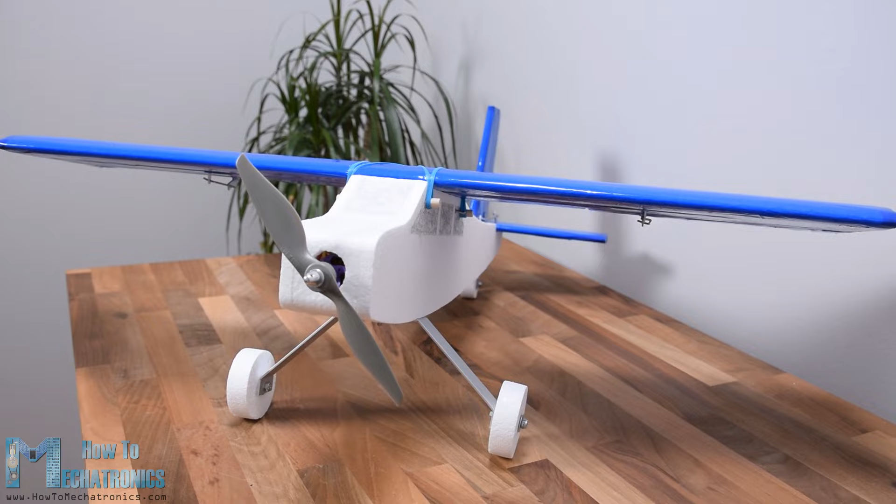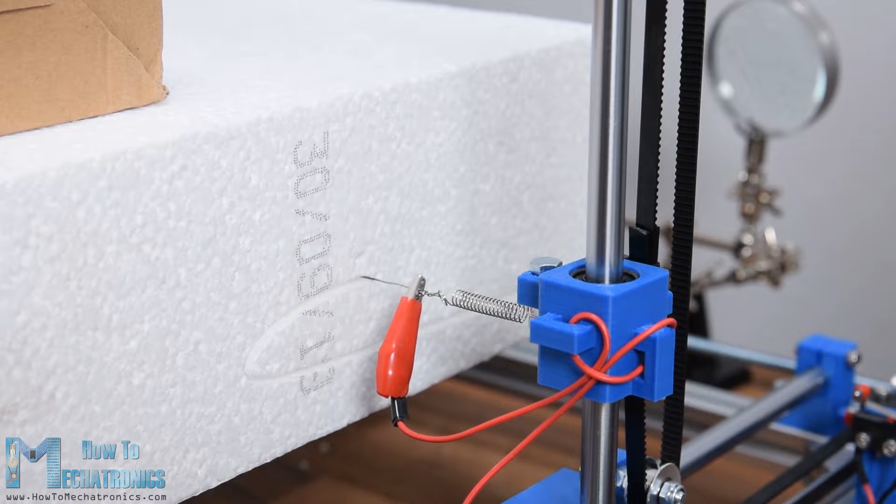So, the airplane is entirely made out of styrofoam. For making the shapes, I used my Arduino CNC foam cutting machine, which I already showed you how I built in a previous video. Although I'm using a CNC machine for building this Arduino RC airplane, I can still say it's 100% DIY because the CNC machine is also a DIY build.

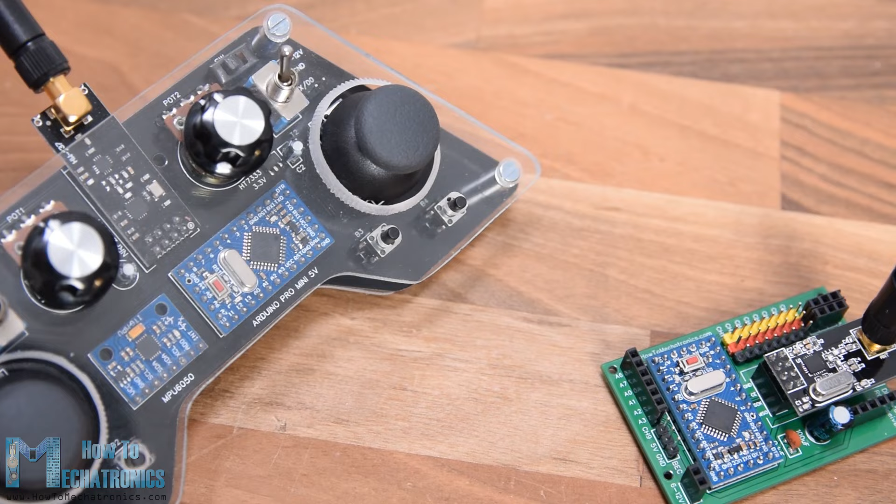Moreover, the control of the airplane is also 100% DIY, based on Arduino and the nRF24L01 module for the radio communication. Using the right joystick of the transmitter, we can control the ailerons and the elevator of the airplane, and using the left joystick, we can control the rudder and the throttle.

In addition to that, using the right potentiometer, we can adjust the control's responsiveness or reduce the amount of servo travel. And using the left potentiometer, we can sub-trim the rudder or adjust the neutral position of the servo arm. Oh, and I almost forgot to mention, the main feature of this Arduino RC airplane is flying. So yeah, it can fly.

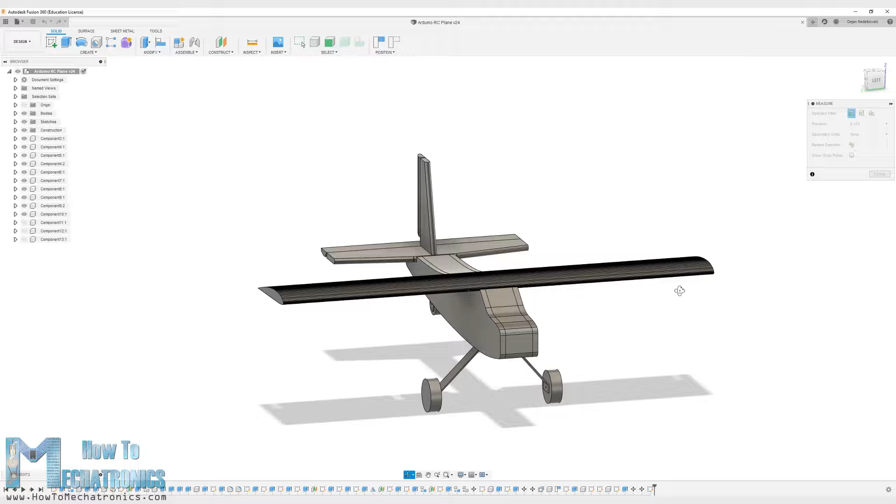I started by designing the airplane using a 3D modeling software, Fusion 360 in this case. I made the design by looking at some commercial RC airplanes and following some basic guidelines or rules of thumb for model airplane parameters. The starting point is usually the wingspan, and I chose it to be 80 centimeters. From there we get the fuselage length, which is generally 75% of the wingspan.

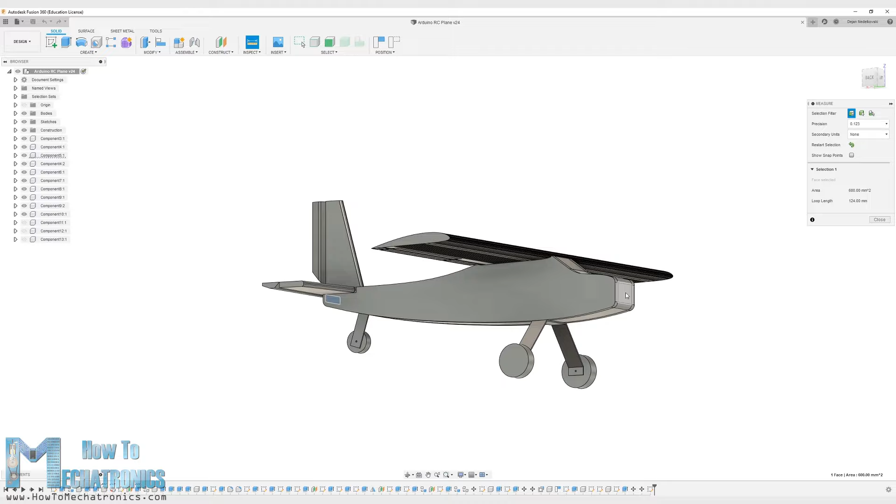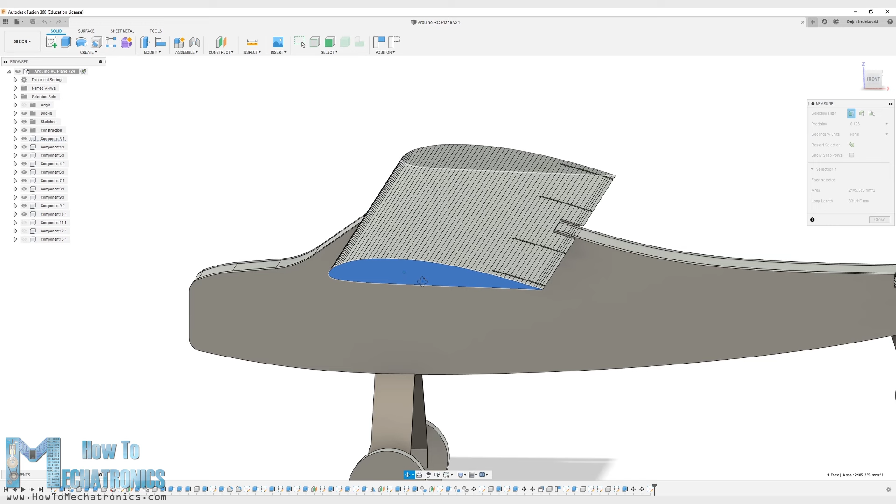As for the airfoil, or the wing cross-section, I chose the Clark Y airfoil, which is a popular choice for RC airplanes. I downloaded the airfoil shape from airfoiltools.com as an SVG file and then I imported it into Fusion 360. I adjusted the size appropriately so that the wing chord, or the length of the wing in streamwise direction, is around 1/5 of the wingspan.

The horizontal and the vertical stabilizers are also sized according to those basic guidelines, and I will include all these parameters in the website article in case you want to design your own airplane. Also, I will include the 3D model of this airplane so you can download it. The link to the website article is in the description of the video.

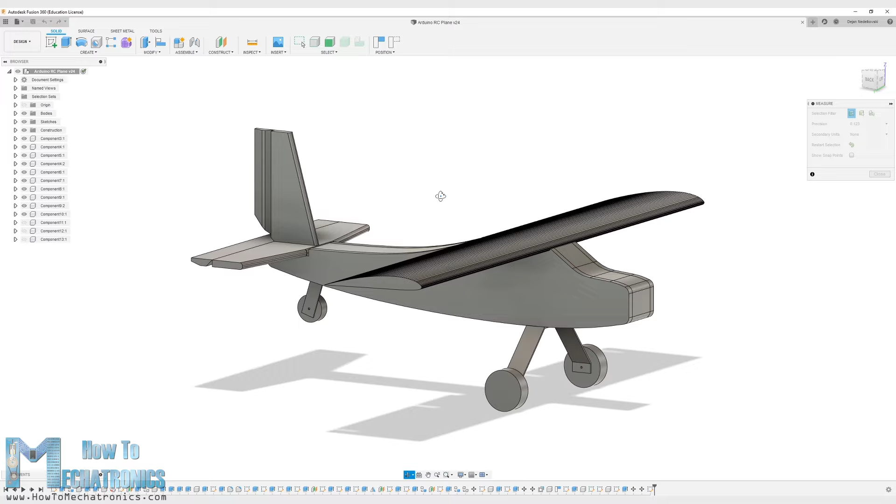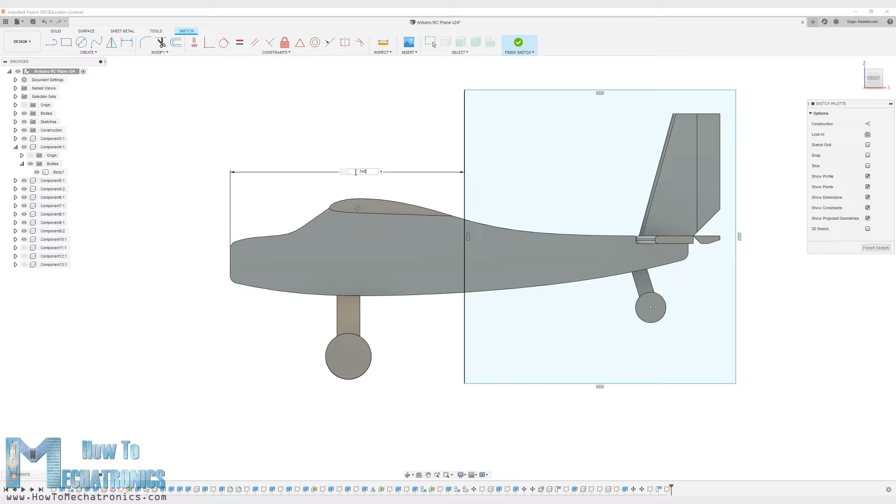The fuselage of the airplane will be made out of two 10mm sides and a 50mm core, which will be hollow to accommodate the electronics. Now, as my Arduino CNC foam cutting machine work area is limited to 45 cm and the fuselage is 60 cm in length, I had to make the fuselage out of two parts. So I cut the fuselage at 34 cm from the front point and made a new sketch in which I projected the shape and added a point near it.

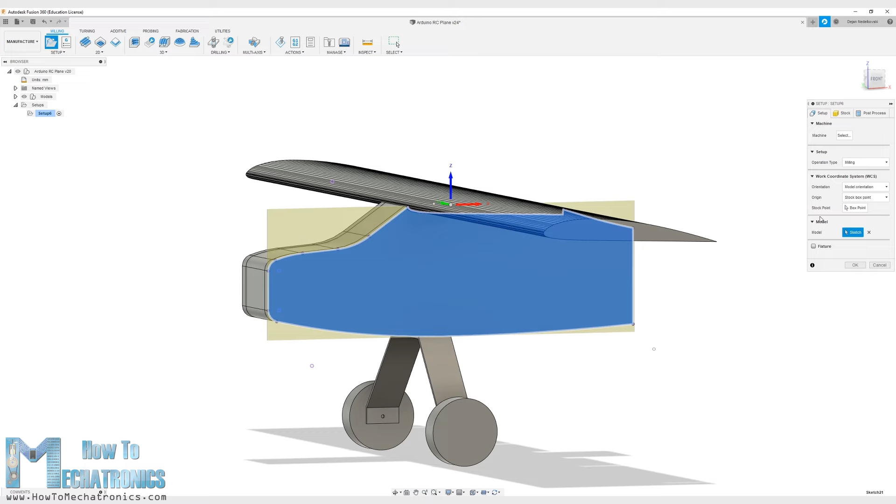Next, in the manufacturing tab of Fusion 360, I can generate the G-code for cutting the shapes. Here, first I made a new setup where I selected the sketch as a model, selected the point I added earlier as origin for the setup, and adjusted the X and the Y axis appropriately. Then I chose the 2D contour operation and generated a new tool with a diameter of 3mm because that's the approximate size of the cuts that the hot wire makes when passing through the styrofoam.

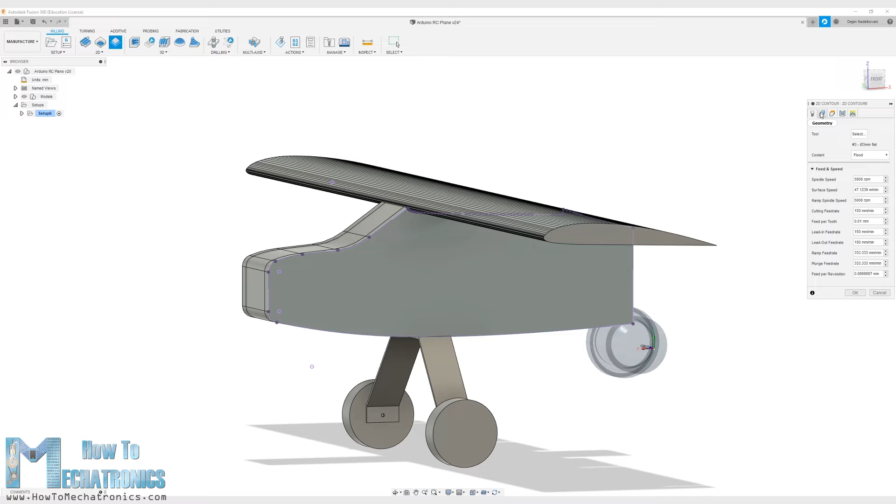Here we can also set the cutting feed rate, which depends on the hot wire itself and the hardness of the styrofoam. I set it to 150 mm per minute. Then in the Geometry tab we can select the contour or the shape that needs to be cut. As for the heights, I set all of them to 1 mm as there isn't any z-axis movement on my foam cutting machine. Lastly, in the linking tab, I selected the entry position to be the edge located near the origin point.

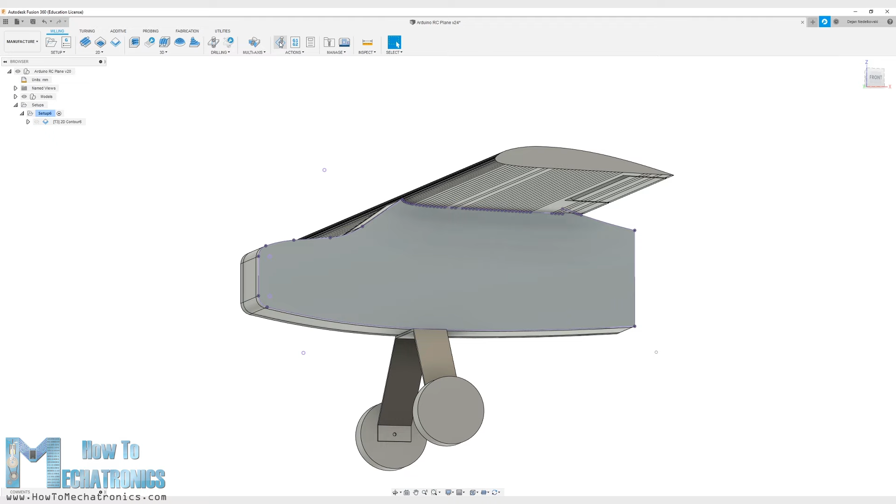With this, the toolpath is generated and we can take a look at it by clicking the simulation button. The toolpath should be a closed loop single pass, and if that's the case, we can finally generate the G-code. For that, we can go to Post Process, select the Grbl firmware, select the output folder, name the file and click the Post button.

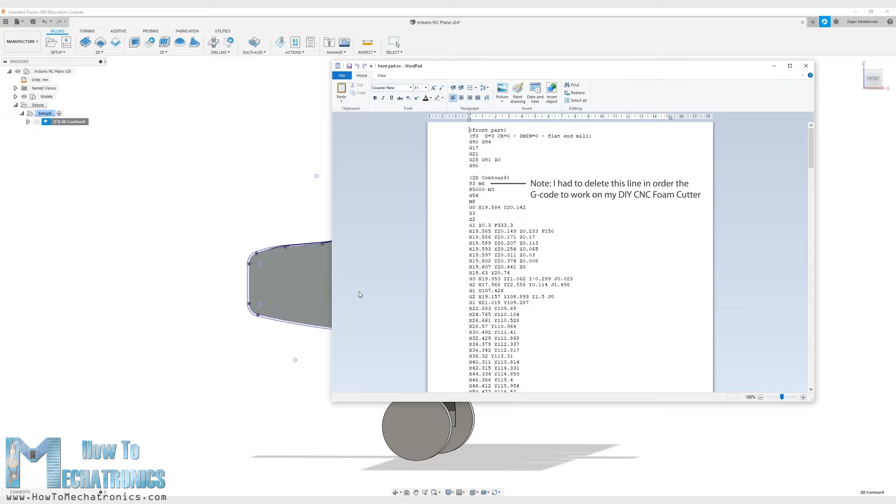Then we can save the file and we can see the G-code in the WordPad editor or something similar to it. So once we have the G-code file, we can load it in the Universal G-code Sender and send the G-code to the CNC machine to make the shape.

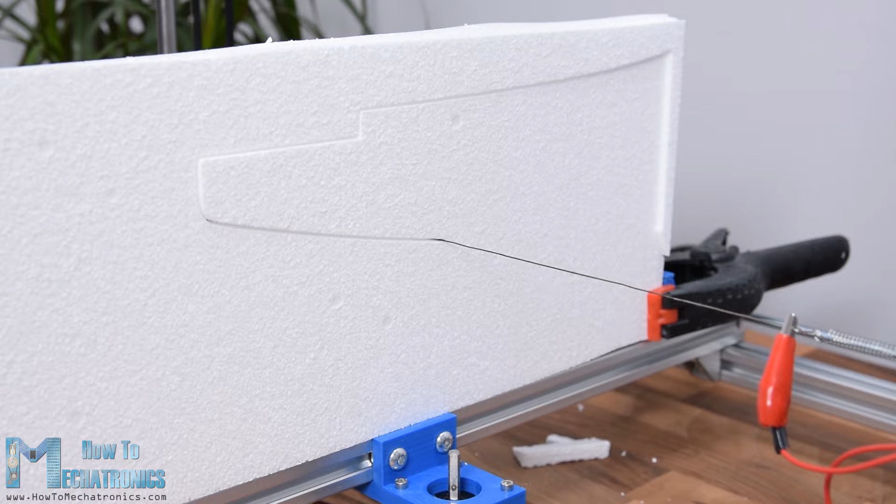We can note that the process that I have just showed you is probably not the best one, or not professional at all, but still it does the job for getting the G-codes to work with my DIY CNC foam cutting machine.

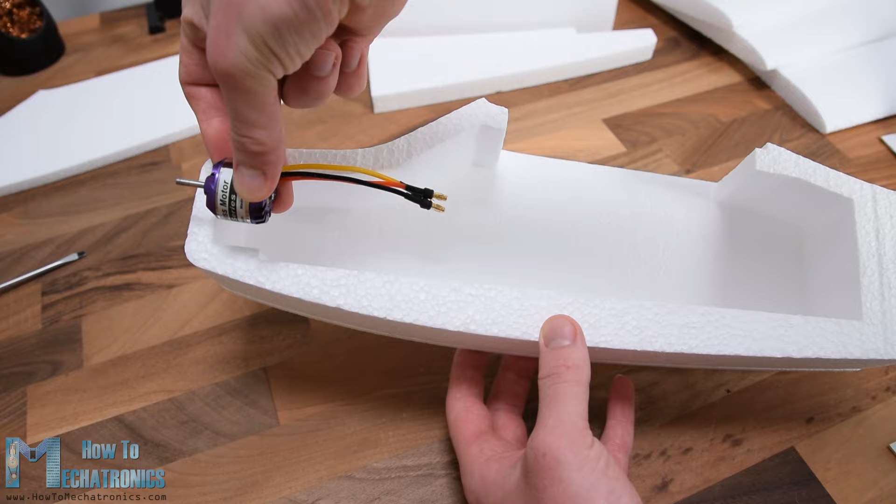Before gluing the other side, I will make the holder for the motor. For that purpose I am using 30 mm wide aluminum profile, which is pretty lightweight. I cut the profile at around 18 cm, marked the holes for mounting the motor and drilled them using a 3 mm drill bit. Then I bent the profile at 90 degrees.

I secured the motor to the holder using some M3 bolts. Using this assembly, I made a hole through the front part of the styrofoam. Then, using a utility knife, I enlarged the hole to 30 mm in diameter, the same as the motor diameter.

Next, on the other side of the motor holder, I made 4 holes which will serve for securing the holder in place, and also for attaching the landing gear. I marked the location of these holes on the fuselage, and using a 4 mm drill bit, I made holes through the styrofoam manually. I made another aluminum piece around 7 cm long with the same holes, and now I can use it for securing the motor holder.

Using M4 bolts, we can easily secure the motor holder in place without damaging the styrofoam. However, I will do that later, so I removed them and continued with gluing the other side. Using the same method, I glued the back pieces as well.

Okay, so the next step is the marriage, or connecting the front and the back part of the fuselage. In order to make the connection stronger, I will add some simple barbecue sticks in between them. I would suggest using even bigger sticks, because when the airplane crashes, it might easily break here.

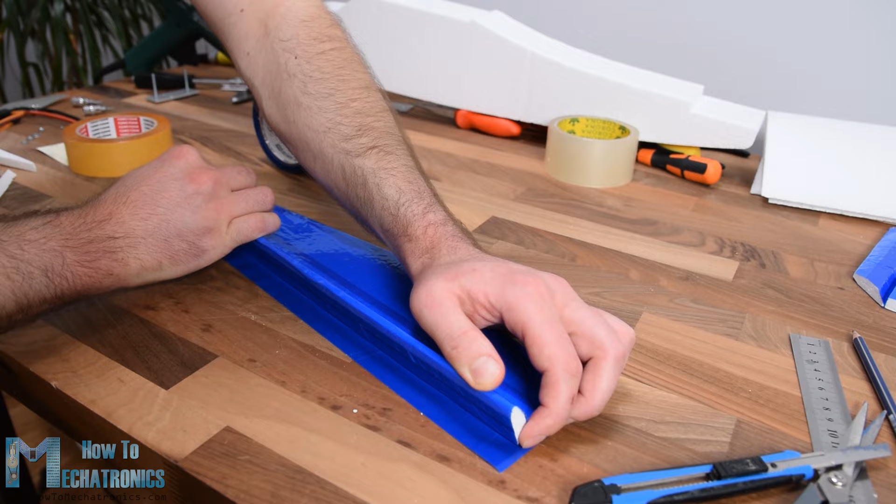Now finally I can make the hinge for it, and I am doing that using the packing tape again. So I just connected the two parts together with the tape, and that makes quite a strong hinge. I repeated this process for the horizontal stabilizer as well. For making the hinge even stronger, we can also add tape on the other side.

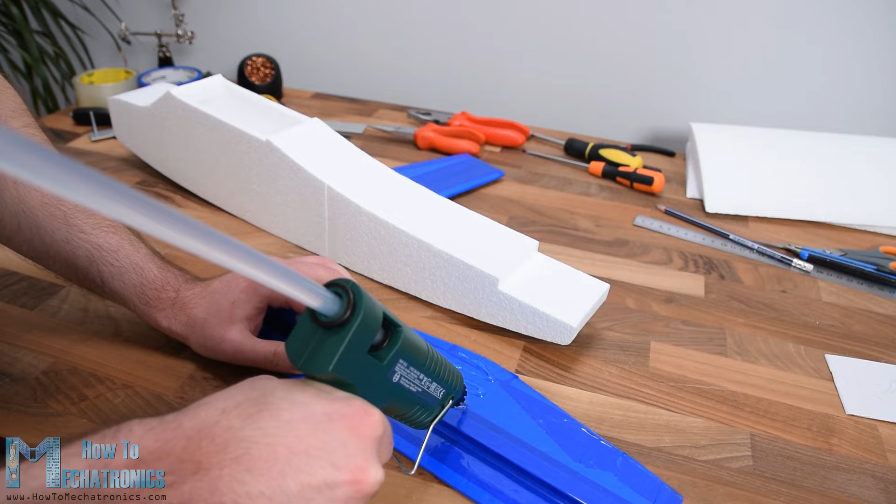Using the same tape, I wrapped the sides, and with that the two stabilizers were done. I moved on with gluing the horizontal stabilizer to the fuselage using hot glue.

For securing the vertical stabilizer, first I inserted and glued 3 barbecue sticks through the horizontal stabilizer and the fuselage. Then I put some hot glue on them and the contact surface and pushed the stabilizer down firmly. With this we are done with the stabilizers, and now we can move on with making the wing.

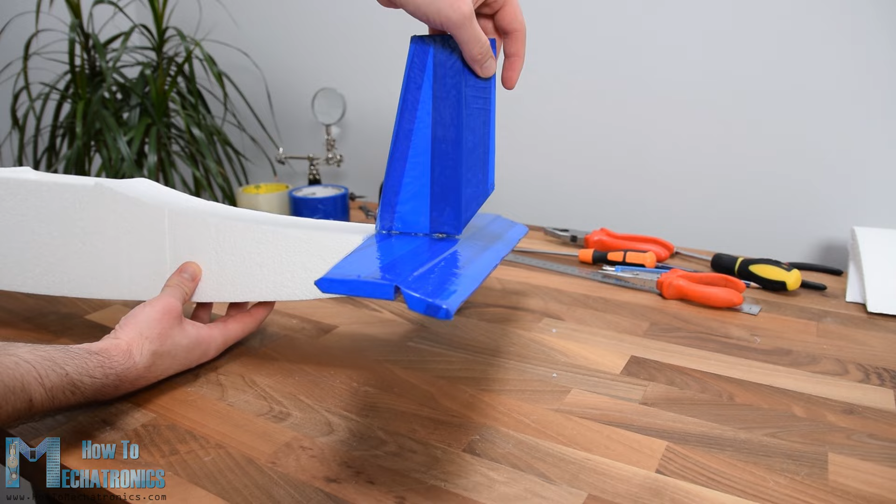As I already said, the wing will be made out of 3 pieces, because of the limited area of my DIY CNC foam cutting machine. Again, I am using barbecue sticks for providing additional strength when gluing the pieces. For attaching them precisely in line, I am using a straight wooden strip on which I can slide the pieces.

Once done with that, the wing is actually quite fragile as it's long and thin. Therefore, I will reinforce it by adding a wooden stick to it. I cut the stick to size and mark the wing where I need to make a pocket so I can fit the stick in it. Using the utility knife, I slowly and carefully made the pocket. I added some hot glue to it and secured it in place without disturbing the airfoil shape too much.

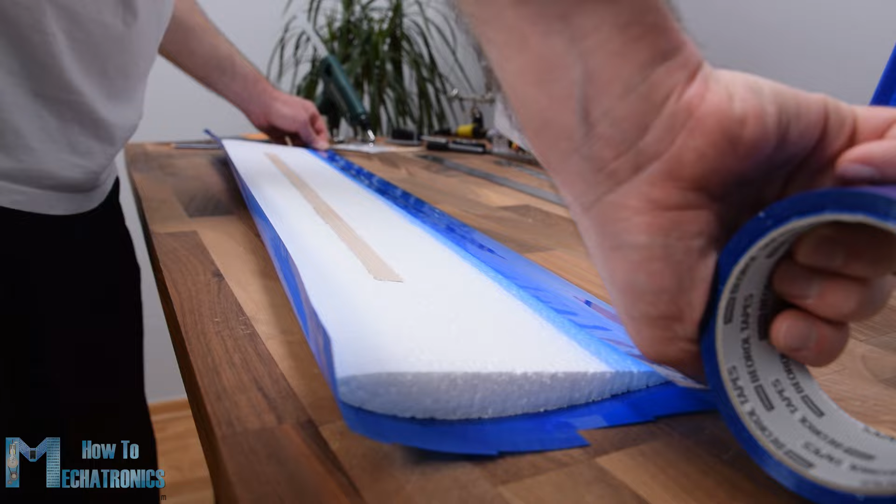Although stronger, it would still easily break apart if it hits the ground, so therefore I will wrap it all with the packing tape, the same as I did with the stabilizers. I started adding the tape from the back side or the trailing edge of the wing to the front side or the leading edge. In this way the incoming air from the front won't tend to detach the tape. Although this process looks pretty easy, it can be a bit annoying if you don't have steady hands and enough patience.

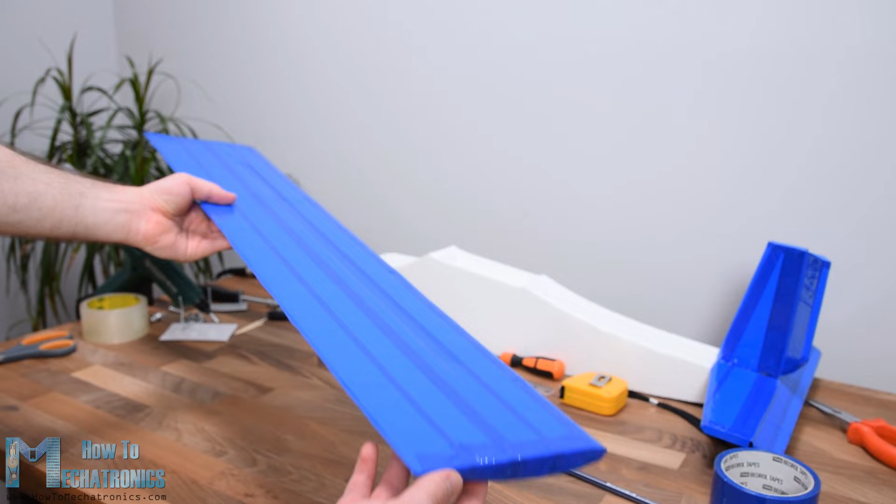Nevertheless, I think the wing came out just perfect. Now it is much stronger, more aerodynamic, and it looks quite good. Okay, the next step is making the control surfaces of the wing, or the ailerons. I'm going to make them 22 cm wide and about 1/5 of the wing chord in length.

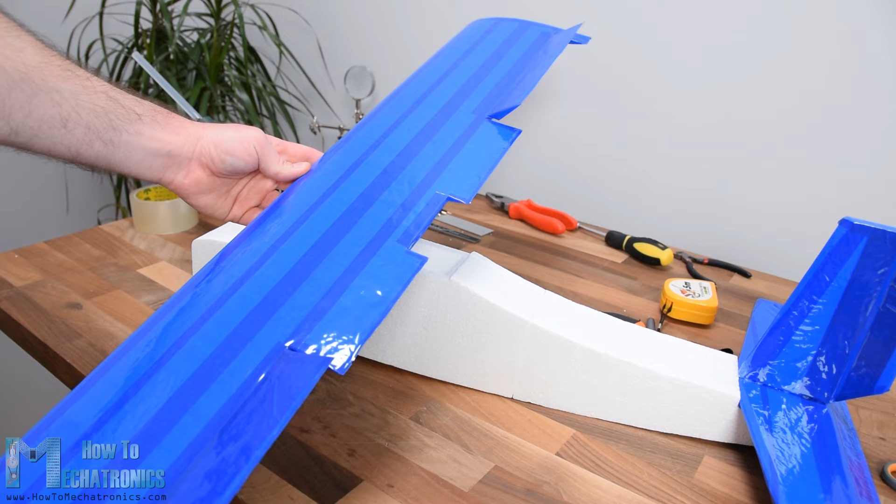In order to be able to move freely, I cut off like ½ centimeter of it. And of course I wrapped all edges exposed by the cutting with the tape. Next I beveled the bottom part of the aileron at 45 degrees, and in the same way as shown earlier, now I can hinge it to the wing. In order to fit on the fuselage and be able to easily attach the wing on the fuselage, I had to make one more recess in the middle of the wing.

Next, it is time to install the servo motors for controlling the ailerons. I'm using the 9 grams micro servos. I marked the location where they will be placed, and using a utility knife I carefully made an opening in the wing so that the servo can fit in. Meanwhile, I removed the mounting brackets of the servo. I put some glue on the servo and inserted it in the opening.

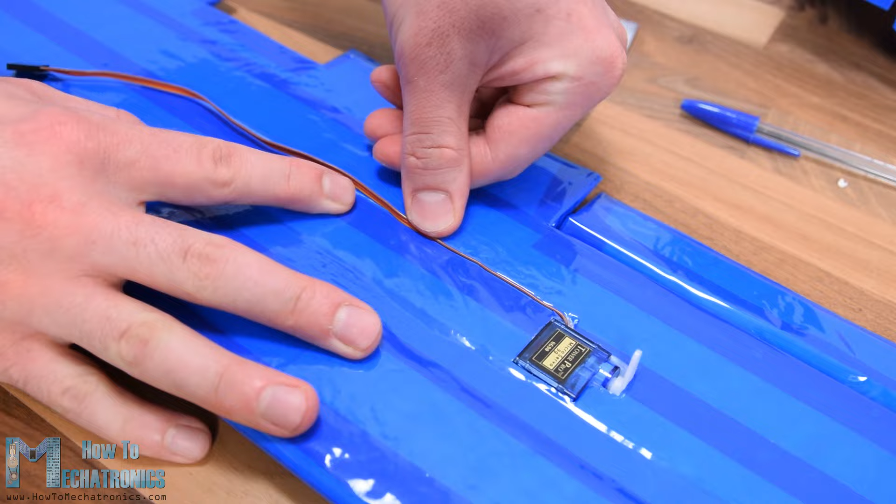Then, using a utility knife, I made a small groove from the servo to the center of the wing so that I can fit the servo wiring in it. Finally, I covered everything with a piece of tape. I repeated the same process for the other side as well.

I continued with making the control horns. I'm going to make them out of the aluminum profile that I used before for making the motor holder. I draw the shape by hand to approximately match the servo motor horn height and to hang over the hinge point. I cut the shape using a hacksaw. I will use 2mm steel wire as control rod, so I made an opening in the horn using a 2.5mm drill. I made a small groove in the aileron and glued the horn in place.

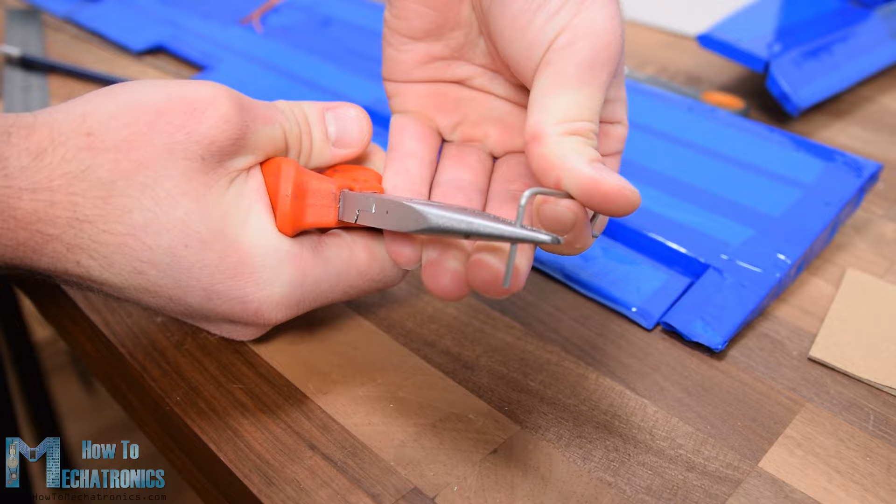Then I measured how long the control rod should be, and I made it out of 2mm steel wire with the help of some pliers. We need to note that when measuring and inserting the control rods, the servo motors need to be in neutral position. We can do that manually by placing it in the middle of its motion range, or by connecting it to a servo tester, or do that with an Arduino. I repeated this process for the other side, and with that the wing is now completely done.

Next I need to install the servos for controlling the rudder and the elevator. I'm using the same 9g micro servos here as well, and the process of installing them is actually pretty much the same as I have just explained. First I marked the location, made the opening using a utility knife, and glued the two motors in place. Here they are placed next to each other, but their output shafts are on the opposite side.

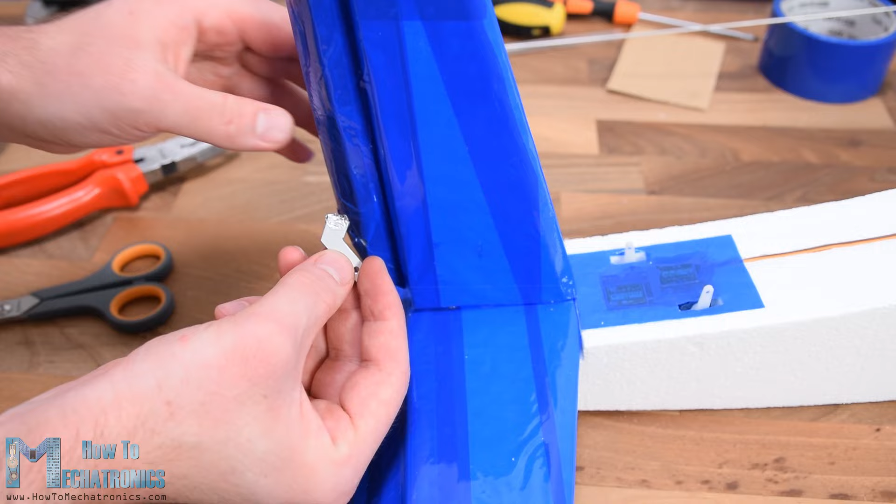Again, I made a small groove in the fuselage in order to conduct the servo wiring to the electrical compartment. I covered the servos with a piece of tape and made openings for the servo horns. In the same way shown earlier, I made the control horns and glued them in place using a glue gun. Lastly, I made the appropriate control rods and installed them accordingly.

Okay, so next I'm going to install 8mm wooden sticks which will serve for securing the wing to the fuselage. I made the holes manually using an 8mm drill bit. The rods should hang over around 1 cm on both sides. I secured them to the fuselage using some hot glue, and here's how they actually work.

We use rubber bands for securing the wing to the fuselage. In that way the wing can be easily removed, and in case of crashing, the rubber bands will significantly reduce the impact of the wing. At the same time, the whole assembly is plenty strong.

Next I'm going to make the landing gear. For that purpose, again, I will use the same aluminum profile and wheels made out of styrofoam. I made them using the CNC machine the same way as explained earlier. I made some small grooves on the aluminum profile so I can easily bend it. Here's how the landing gear should look after bending it.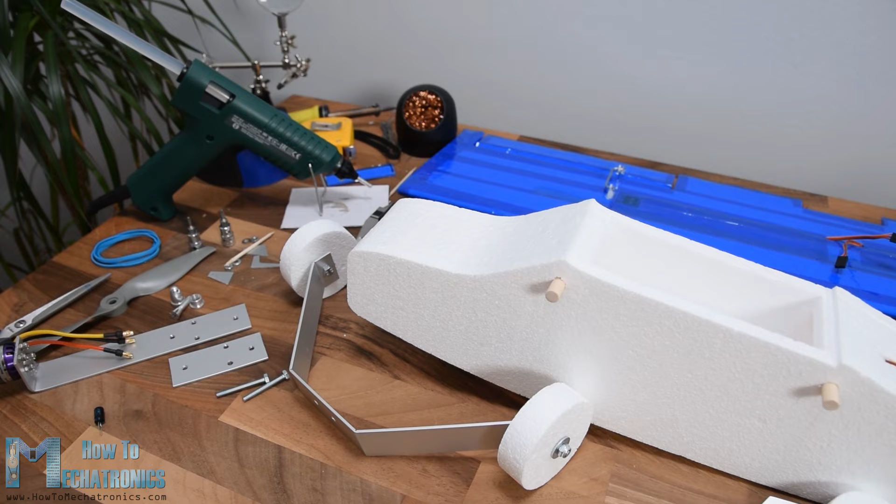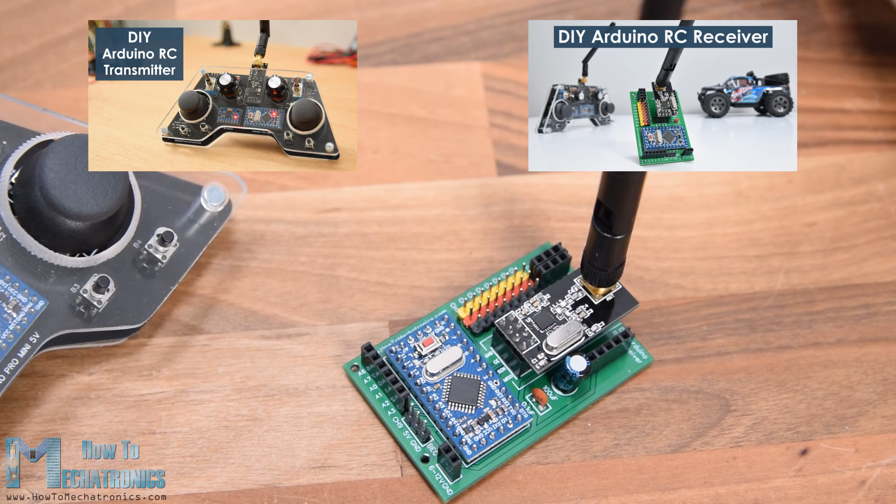Okay, so now all the components are ready, and before I assemble them, let's take a look at the electronics of this project. So, as I already said, this RC airplane is entirely based on Arduino. Both the transmitter and the receiver are custom builds based on the Arduino Pro Mini board. I already have detailed tutorials on how the transmitter and the receiver work, so you can check them out for more details. Here I will explain the circuit diagram and the working principle of this Arduino RC airplane and how everything needs to be connected. So the radio communication is based on the nRF24L01 modules.

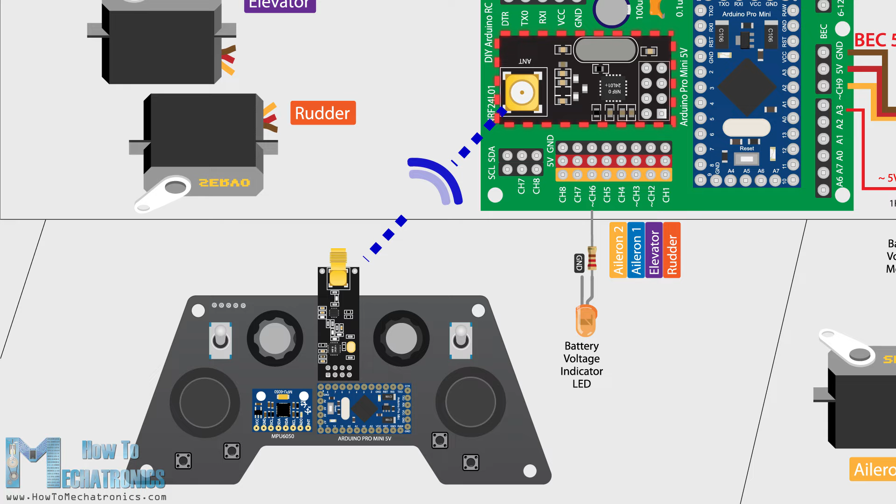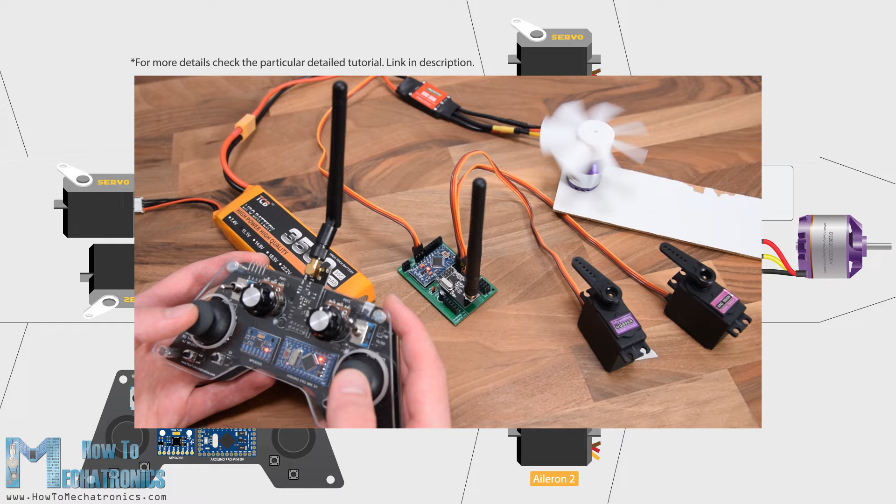Although it might look a bit complicated, this DIY Arduino transmitter is actually quite simple. It has several controllers, the joysticks, the potentiometers and some buttons, and it constantly sends their data to the receiver. The receiver receives this data wirelessly through the nRF24L01 module, and it outputs appropriate commands to the servos and the brushless motors for controlling the airplane. Controlling servos and brushless motors using Arduino is also quite simple, so therefore this entire Arduino RC airplane concept I think is not that hard to understand.

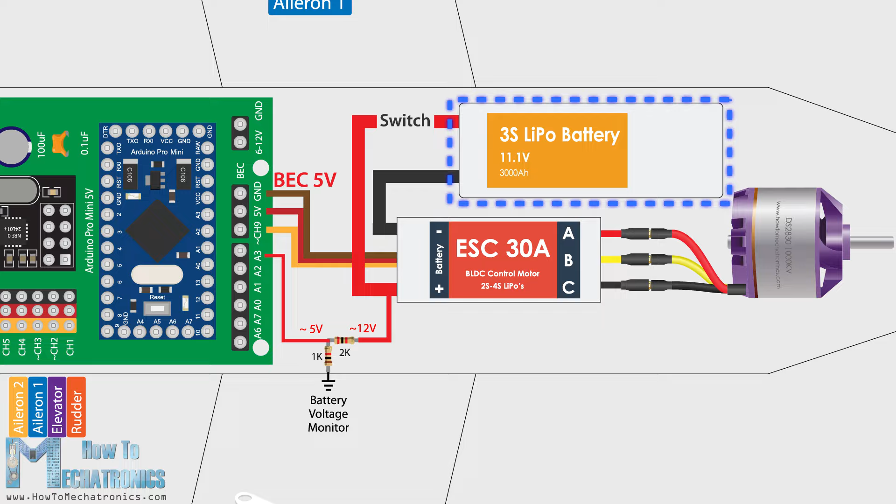The brushless motor I am using in this project has a rating of 1000KV, and it requires a 30 amp ESC. The ESC drives the motor and also provides power to the Arduino and the servos through its battery eliminator circuit feature, which outputs 5 volts. And the power for the ESC and the brushless motor comes from a 3S LiPo battery.

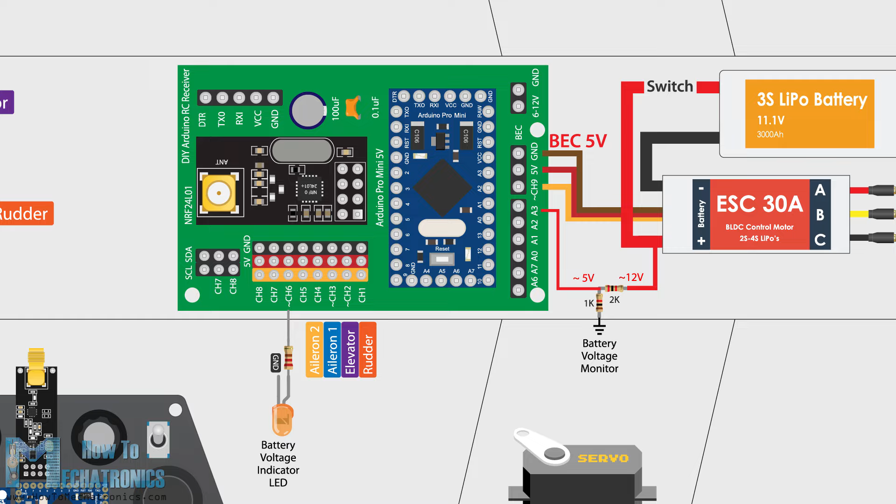I added one more thing to this airplane, and that's a simple LED which will indicate if the battery is empty. Using a simple voltage divider, we can drop the 12 volts coming from the LiPo battery to around 5 volts, so we can read them with the Arduino analog input, and so we know when the battery will drop below 11 volts. The receiver still has several free channels, so we can add more features to this airplane if we want, like strobe lights, flaps, dropping mechanisms and so on.

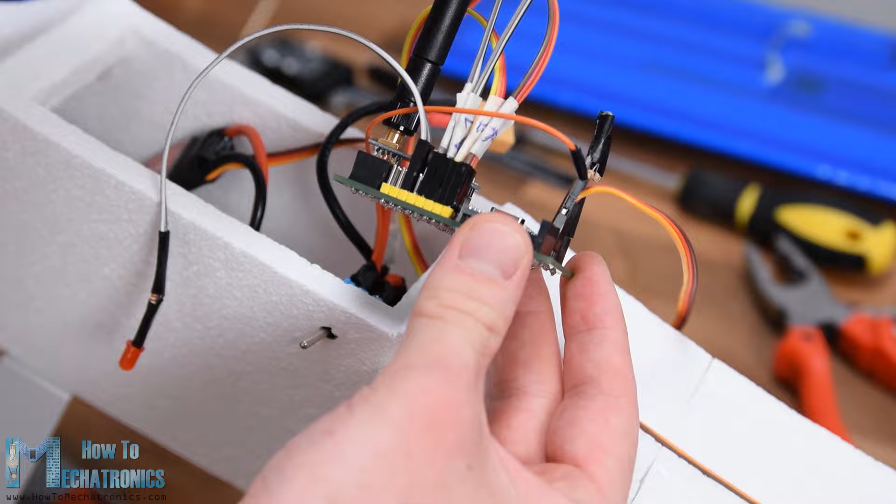Nevertheless, now we can finish the assembly. So I connected everything as explained in the circuit diagram. On channel 1 is the rudder, channel 2 the elevator, channels 3 and 4 the ailerons, and on channel 6 is the LED. I glued the LED on one side and the power switch on the other side.

We can note here that the landing gear is attached to the airplane using the 2 bolts on the motor holder. I actually lost some of that footage, so I cannot show you exactly how I did it. In a few words, I simply inserted the motor with the holder from this top opening, bolted it in place as shown earlier, and attached the landing gear as well. When inserting the holder, I also added some rubber bands so they can hold the battery in place. So once I connected the battery to the ESC, I squeezed everything in.

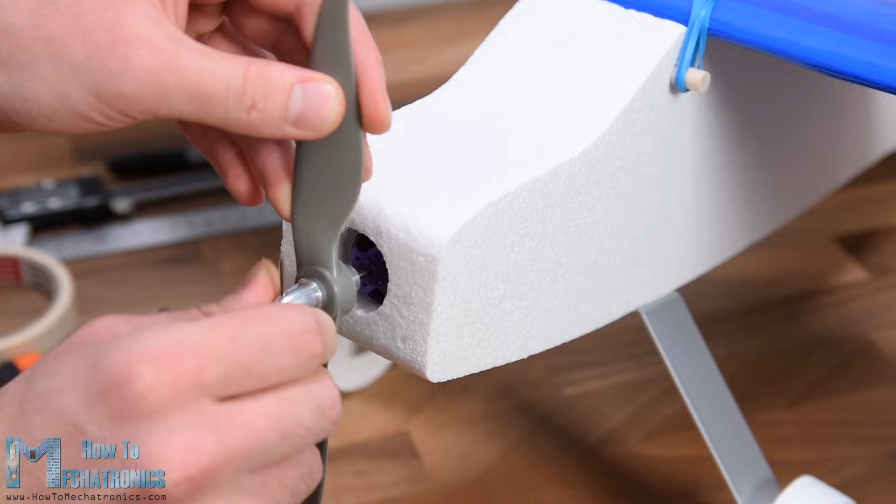Finally, using the extension cables, I can easily connect the wing ailerons to the receiver and then secure the wing to the fuselage. On the front, I attached the propeller to the motor, and what's left now is to check the CG, or the center of gravity of the airplane. The CG is probably the most important factor whether the airplane will fly well or fly at all. The airplane initially was tail heavy, so I moved the battery to the front and it got balanced.

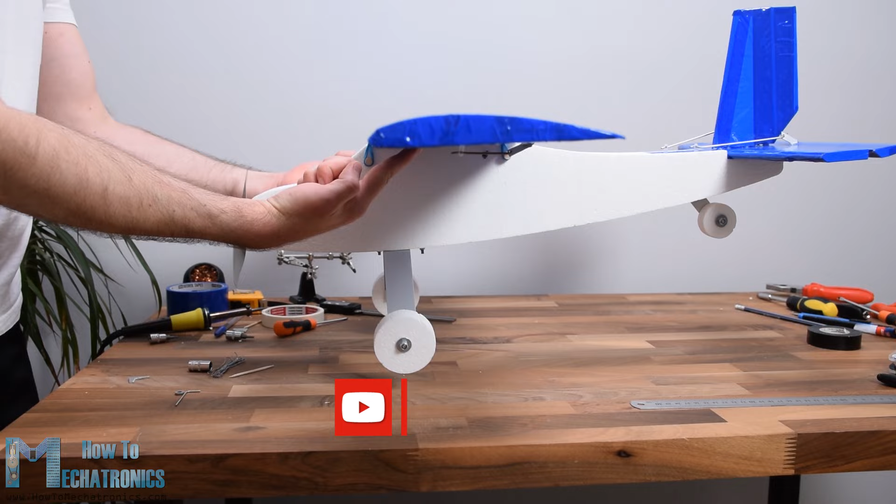So that's it, our Arduino based RC airplane is now done and we can go outside to try it out. Here's its first try, or the maiden flight.

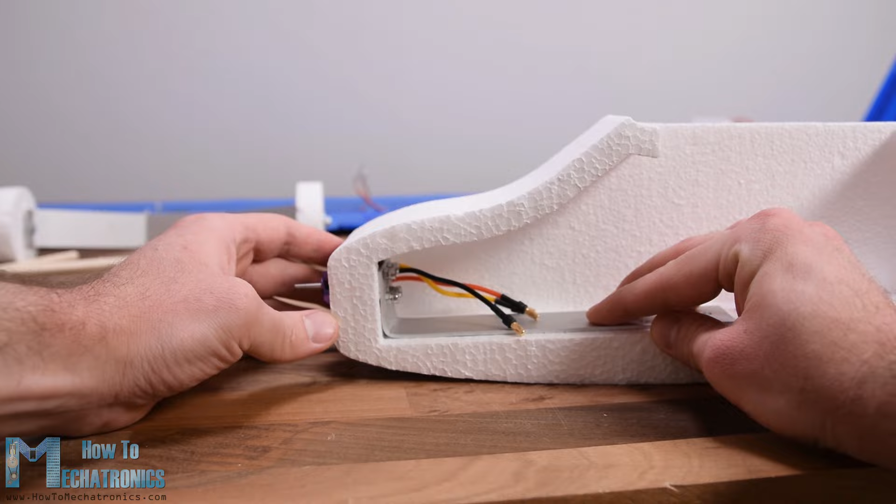Well, that was not so cool, especially after seeing the result of the crash. My conclusion here was that the airplane was still tail heavy and it felt like the motor didn't have enough power. As I didn't have another motor or propeller to try, I modified the nose of the plane to be a bit smaller, moved the motor more to the front so it has better airflow, and also rounded the edges on the front. As for the structure, I reinforced it with some wooden sticks and aluminum profiles that I glued in the inside area of the fuselage.

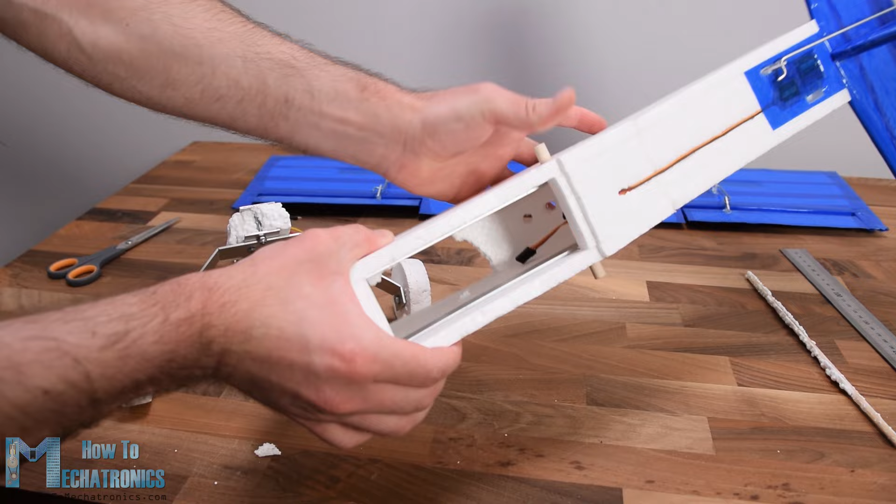At the bottom of the electronics compartment I made 2 holes, one for the air to escape that comes from the front opening and the other for getting the NRF24L01 antenna outside for having better range. Okay, so here's the second try. Again, almost the same thing, though it felt like it had better airflow or more power now. The fuselage broke again, which tells that this styrofoam is pretty weak for this purpose. I made a new fuselage and this time I used a little bit of duct tape for reinforcing it.

Try number 3. It looked promising, but the terrain I have for takeoff is actually not good at all. The airplane started moving to the right, hit the edge of the road and broke again. I repaired it again and this time I wrapped almost the entire fuselage with duct tape. I should have done that much earlier as this gave the right strength to the fuselage and it didn't break even after several more crashes.

The problem now though is that after several crashes I broke all 4 propellers that I had, so in this try I'm using a glued propeller. Of course the propeller tore apart at takeoff. I tried with another glued propeller made out of 2 already broken propellers and this time I was actually lucky and the airplane finally took off properly. Well, the luck didn't last so long as the propeller broke again in mid-air.

Nevertheless, as this was my first ever experience with flying an RC airplane, I guess I can consider this project successful, as I managed to prove the concept of making an entirely Arduino based system for controlling RC airplanes. Other than that, we can note from the flight that the controls coming from the transmitter are actually too harsh. That's because the joysticks are not good at all for this purpose. They have small movement range and bad response.